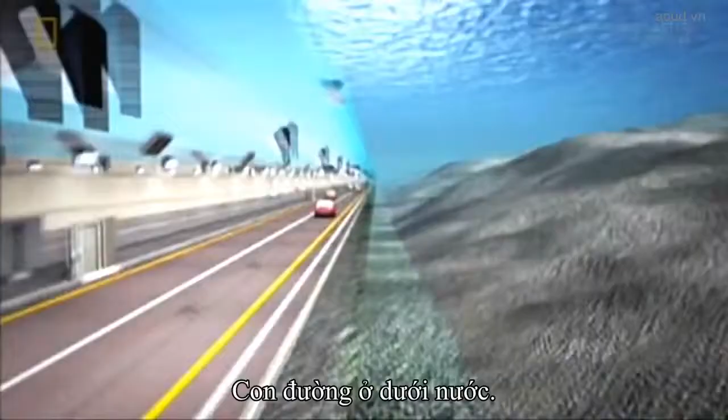Your next vacation may be spent in a paradise you've never heard of. You'll just need a way to get there. Here's the catch. That way has to go underwater. It would become the deepest immersed highway on Earth. Oh, they also have to build a couple of bridges. And did we mention the typhoons?

These tugs are towing a contradiction. A tunnel segment that's both colossal and fragile. Come back. Close. Slow down. A raft of techno breakthroughs and untested results. Bound for a place few know, to entice the world to visit. And even sway the choice for the Olympic Games.

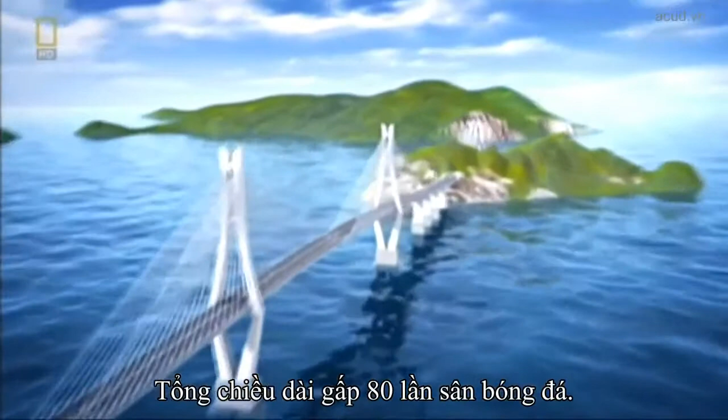The solution will slash travel time from nearly half a workday to 40 minutes and revolutionize life on both sides of the bay. The Busan-Geoje Fixed Link. A 4-lane highway that runs nearly 50 meters beneath the sea. Then it leaps across 2 colossal cable-stayed bridges. Altogether, longer than 80 football pitches. One of the biggest infrastructure projects in the world.

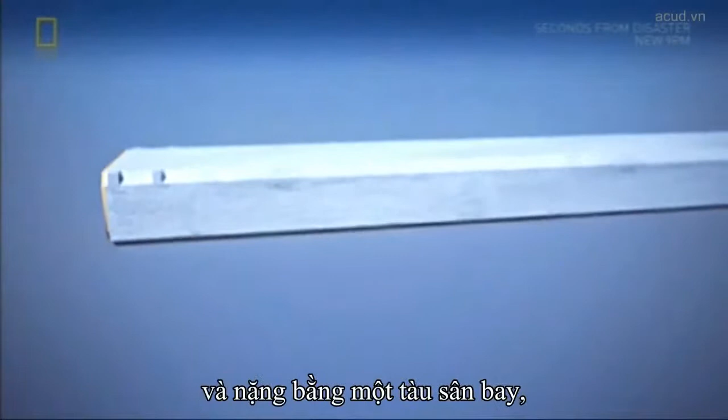Plunging 48 meters below sea level, the link will boast the deepest immersed roadway in the world. The tunnel will be composed of 18 mammoth segments, each as long as 2 football pitches and as heavy as an aircraft carrier. Wide enough to carry 2 lanes of traffic each way, with an access tunnel between. That's the concrete reality. Now, here's where it gets dicey.

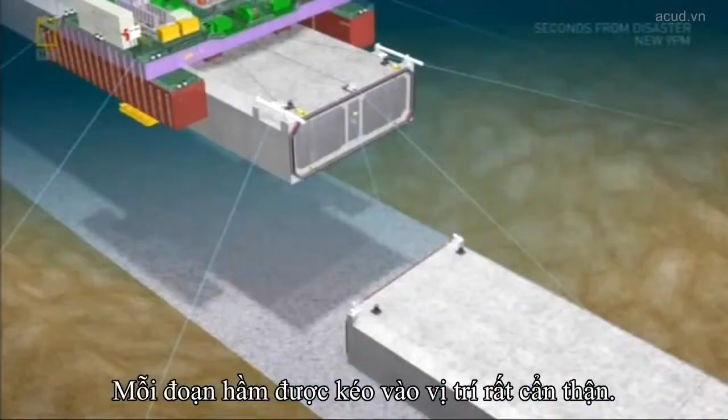Each segment has to be carefully towed into position, then carefully sunk to the seabed. And all the segments have to align within 35 millimeters, less than a thumb's width. Weather adds its own demands. This site is exposed to the open sea. There are always high waves, and the water is deep as well.

It is wide open to the Northwest Pacific Ocean, so we have extreme exposure conditions for the construction period. So we've got to be ready for whatever that sends us, like big swell waves, strong winds, and even occasional typhoon. Building a tunnel like none ever seen will take techniques like none ever tried. Yet the Koreans have never built an immersed tunnel. But this country has.

The Dutch have 5 centuries of experience at holding back the sea. Het afzinken van tunnels. Tunnel immersion is actually a Dutch speciality. If you look at the number of immersed tunnels in the world, most of them are in the Netherlands.

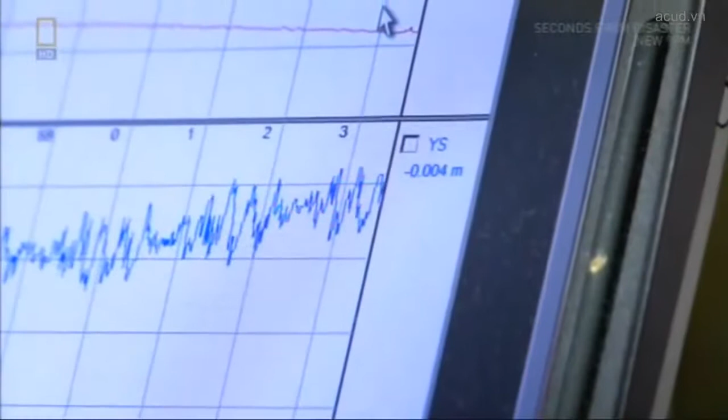The Dutch company had a zest for a challenge and the confidence that they could solve these problems. And so we were able to trust each other. That's how we ended up working with the Dutch. This is what confidence looks like.

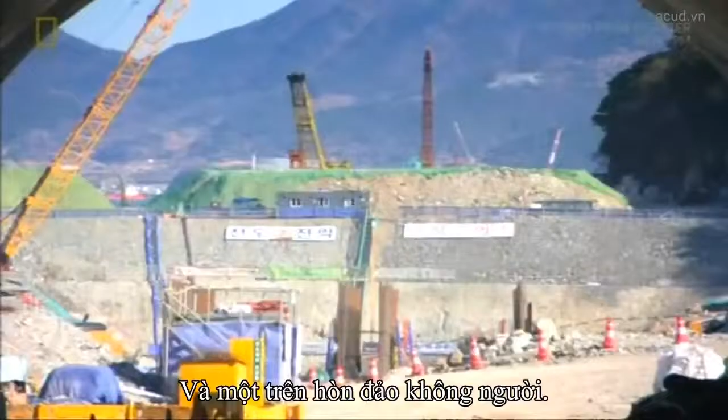Construction begins with the tunnel entrances. One on Gadeok Island, the other on an uninhabited island. From here, engineers will dig down to 12 meters below sea level to meet up with the undersea tunnel segments. But they won't tunnel through the seabed itself. If they did, the gradient would be too steep for driving. Instead, Peter's crew will lay prefabricated tunnel segments on the seabed.

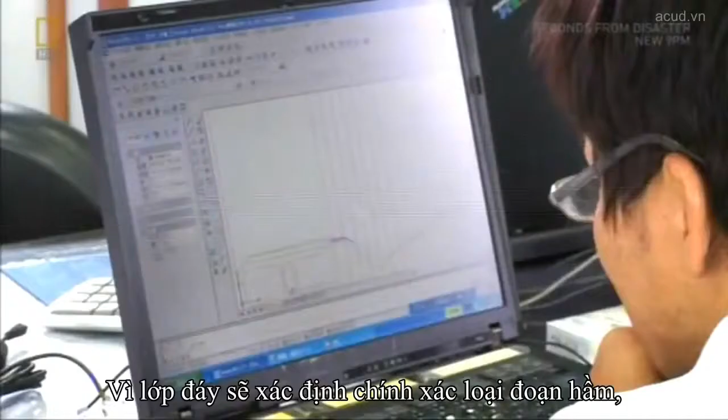First, engineers dredge a trench where the tunnel will rest. To buttress the foundation, they bore concrete columns into the seabed, stopping 3 meters shy of bedrock. The reason? Earthquakes. Avoiding bedrock will give the tunnel crucial flexibility. The segments will rest on a bed of gravel to ensure an even surface. Because the bed determines the exact height of each tunnel segment, the gravel must be placed with pinpoint accuracy.

Later, the entire tunnel will be covered with thousands of tons of crushed rocks to protect it from collisions with ships or anchors. Because the tunnel segments will be prefabricated, the first challenge is finding land for a construction yard. Not an easy task in Busan. If you look around, there's not a single metre of flat land anywhere that a contractor can use as a base for the construction period.

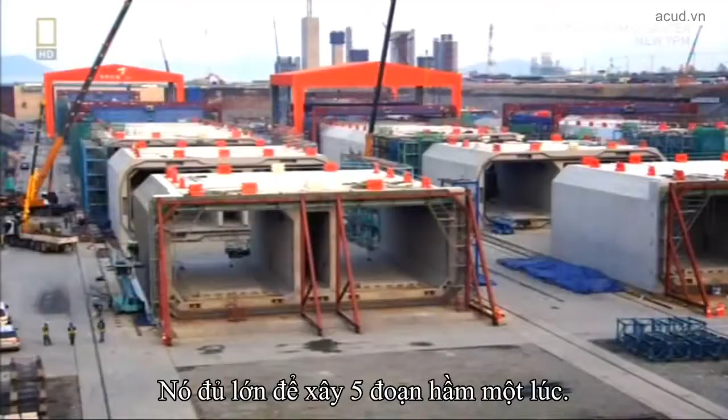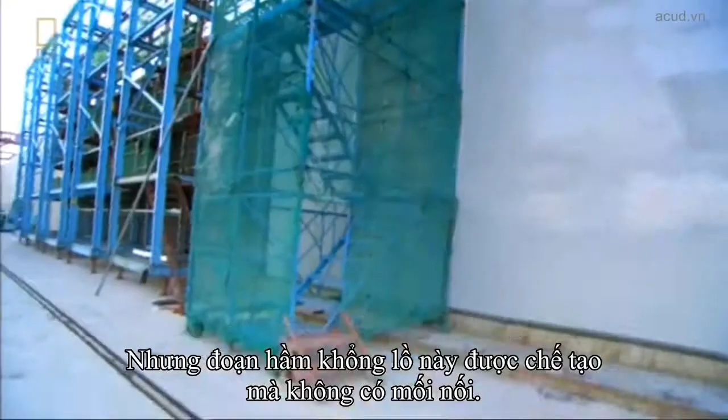From the tunnel site, the closest spot lies 35 kilometres away. It's big enough to build up to 5 tunnel segments at a time. Each segment weighs about 48,000 tonnes and is made of 8 subsections, each twice as long as a London bus. Anyone with a basement knows water can penetrate concrete joints, potentially disastrous in an underwater tunnel. But each giant section is cast without a single joint, thanks to Korean ingenuity.

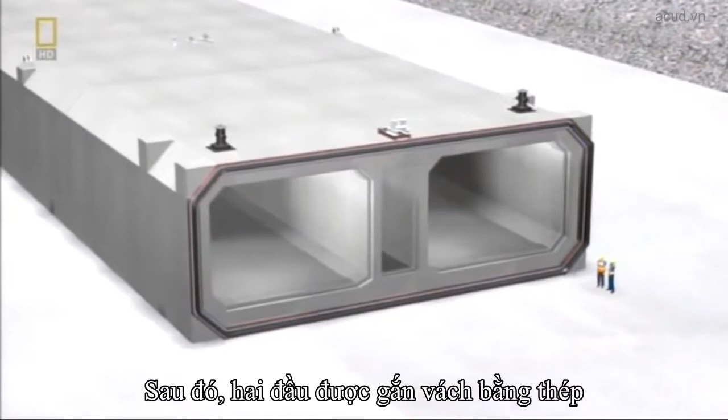We continuously poured full sections from the ground up to the top of the walls to eliminate gaps in the walls. A process lasting 24 hours. After casting, the ends are sealed with steel bulkheads, a Dutch innovation best appreciated later on the bottom of Jinhae Bay. The bulkheads are watertight because these babies are about to take a bath.

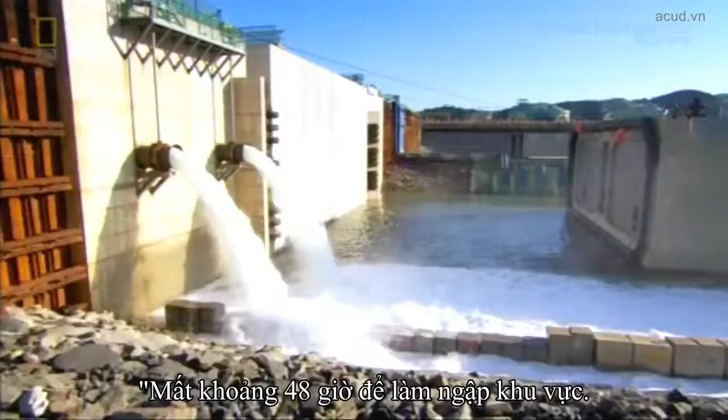Flooding the dry dock will allow them to float the segments out to sea. The inundation of the dock takes approximately 48 hours. During the first phase, we let in water until it reaches the level of the bulkhead door. Then we'll check to see if the bulkheads are leaking. Once all the leaks are repaired, or if there are no leaks, we'll fill up the dock completely. It's enough water to fill 230 Olympic pools.

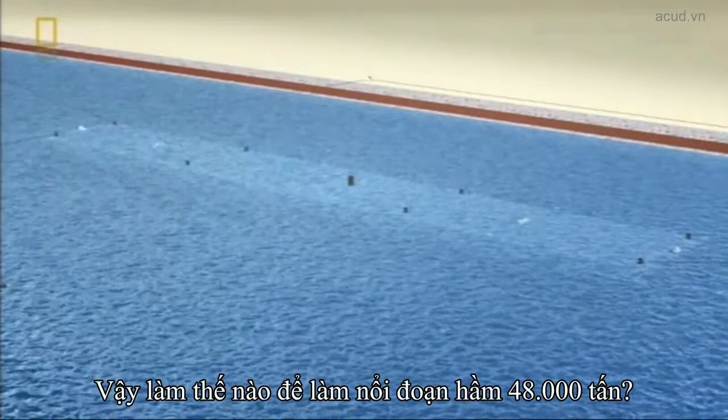So how do you prep 48,000 tons of dead weight to float? Inside every tunnel segment, there are 6 ballast tanks, and they're filled with water.

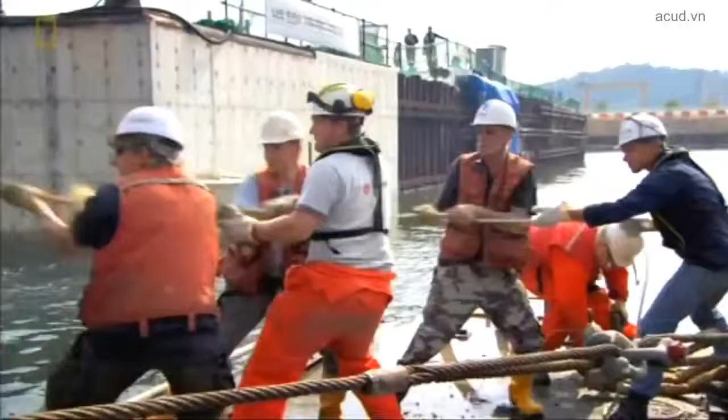To start the flotation process, we begin pumping out the water. We continue until the tunnel segment starts floating. What the tugboat has to do is to tow that slow. Then with the other winches at the backside, we control the tunnel element sideways direction. Now they can begin to warp out the segment. Removing the first segment takes brawn and finesse to avoid colliding with the dry dock.

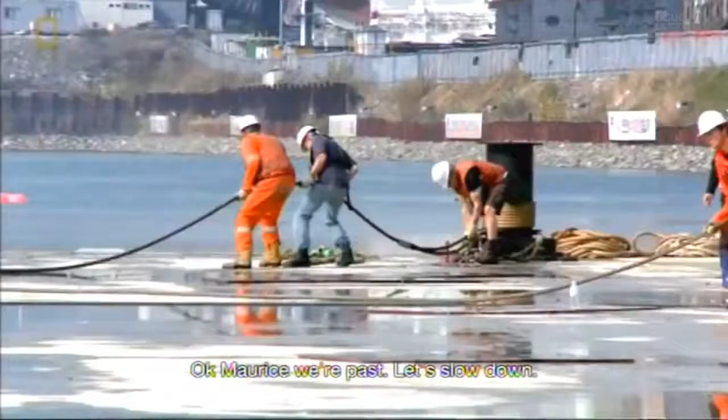Believe it or not, clearing the dry dock was the easy part. While work continues on the undersea tunnel, the rest of the Busan-Geoje fixed link starts to rise. 2 giant bridges. One with 3 pylons, the other with 2.

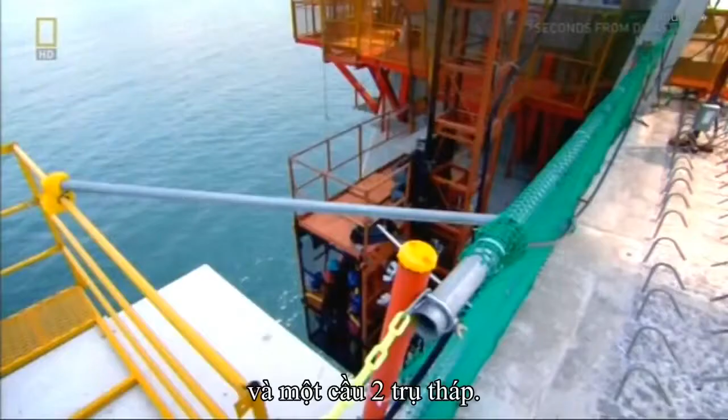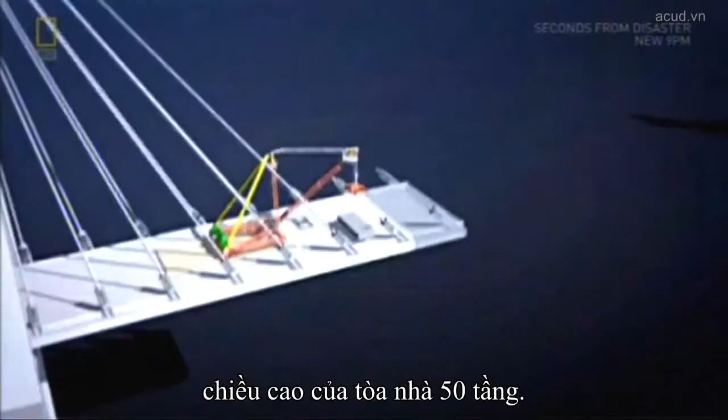At its topmost, the 2-pylon bridge will soar 156 meters above sea level, the height of a 50-story building. The span between the pylons will stretch the length of 5 football pitches, with enough room for the tallest freighters to pass under. Crucial for a city that thrives on shipping for its livelihood.

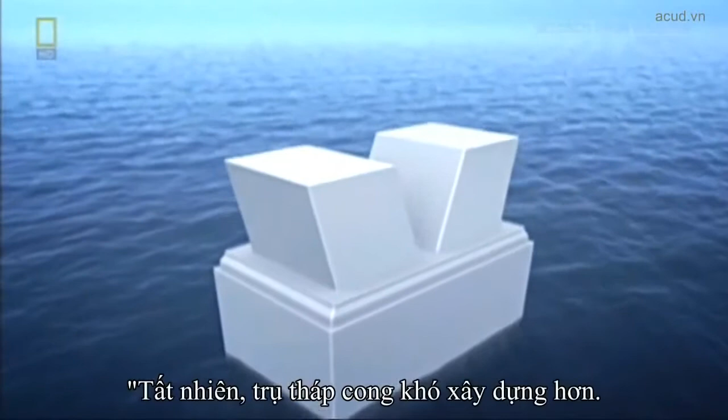The most pleasing aspect of the bridge is also the most daunting. Its curved diamond shape. Of course, curved pylons are very difficult to construct, but they're very much in harmony with the surrounding scenery in many ways, in that they bear resemblance to a mother's praying hands and to the wings of seagulls.

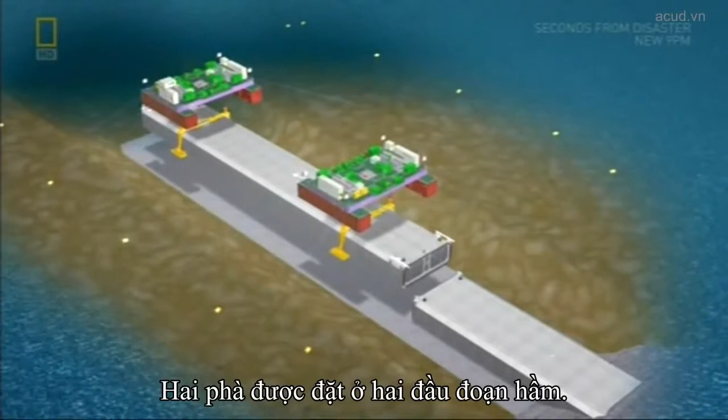35 kilometers away, the first 5 tunnel segments arrive at a temporary mooring site. From here, they'll travel across Jinhae Bay to their resting place on the sea floor, already leveled and lined with gravel. And here's how they'll get there. Pontoons the size of a mansion. Dutch designed, Korean made. One pontoon is positioned near each end of the tunnel segment. After arrival at the tunnel site, mammoth winches on pontoons will lower the segment to the seabed. At least, that's the theory, because it's never been done in the open sea.

A specialist diving team prepares the first tunnel segment for the immersion operation. Divers test connections for data systems and power supplies. Standing by. And remove marine growth from the bulkhead. Down on the wire, please, Steve. Down on the wire. Finally, they install steel wires underneath the tunnel segment, crucial for positioning during immersion. In a good position now, we can come up on the wire. Coming up on the wire.

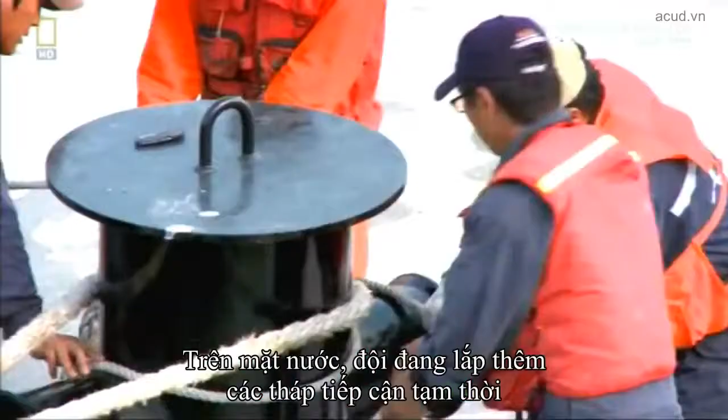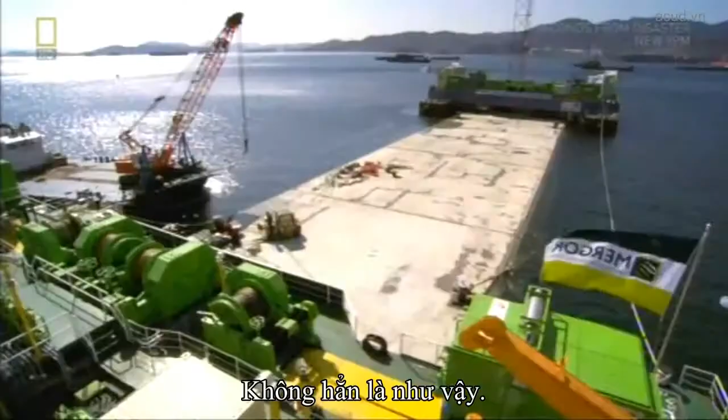Above water, the crew are also adding a temporary access tower, so workers can enter the segment in case of trouble with the ballast tanks. Over, the tunnel is clear. Every problem has to be anticipated, because if things go south, they won't get a second chance. What we do doesn't have anything to do with luck. We know what's involved, we know how the process works, and we have the feeling we control the whole process. Not quite. Back in Holland, the rest of the immersion team stands by to fly out. In all, 56 men wait for Peter to say go, and he's waiting for a forecast.

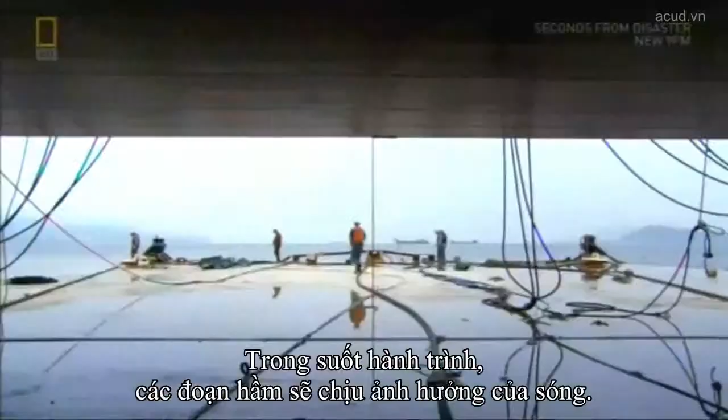When the wind blows from the south, swells roll in from the Pacific. Because we're situated offshore, we have to deal with waves. And these waves can be pretty fierce. Even swells barely 30 centimeters high pack so much force they could fracture the subsections that form the tunnel segment. Throughout its journey, the segment will be at the mercy of the waves, so the team needs 3 days of calm seas. Strukton looked around for a forecaster, but few dared to stick out their neck for such a costly guess. Then, a Danish company seized the challenge. They came up with a model to predict waves as small as 10 centimeters, up to 5 days out. A stunning breakthrough in forecasting.

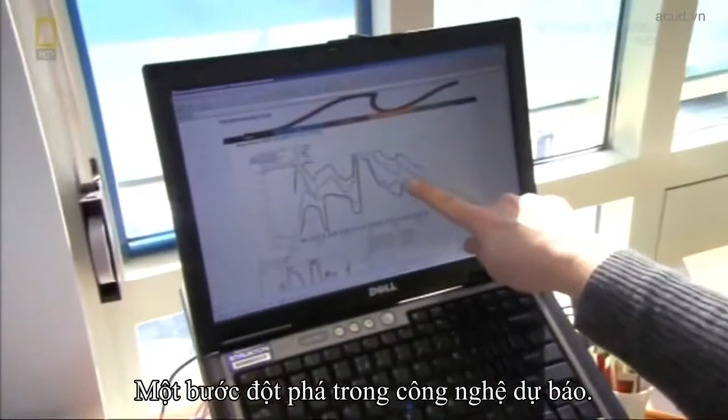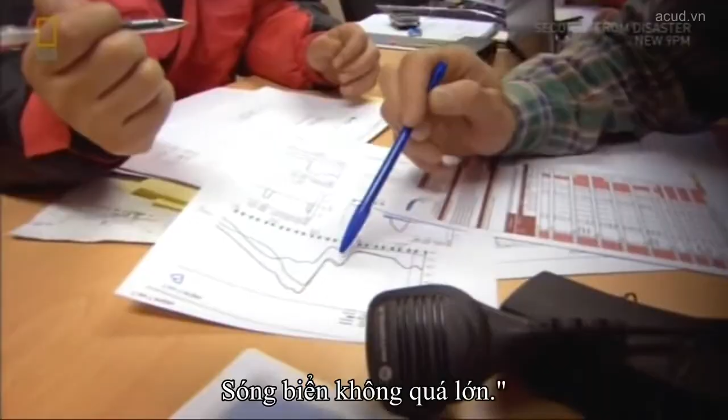That means we're able to say, tomorrow we can do an immersion. And that means we're able to put people on the plane yesterday, really on a last-minute basis. It takes away a big risk for us and for our client. We've got the weather. They're all showing the same prediction. The swell still not as bad. I would say we have a go. Green light. We'll try. We'll try, right? Okay, thank you. Yes, bye-bye. Ahead lie 48 hours of tension for the boss. Six months of work rides on steel threads and a forecaster's guess. Tonight, no one will sleep soundly.

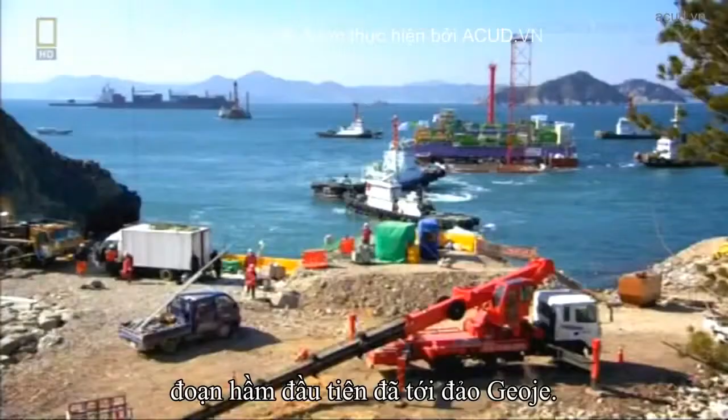After a cautious voyage at 3 kilometers an hour, the first tunnel segment arrives at Gadeok Island, the starting point of the tunnel. Joining Peter is the elite team fresh from Holland, among the few men on the planet who can do this job.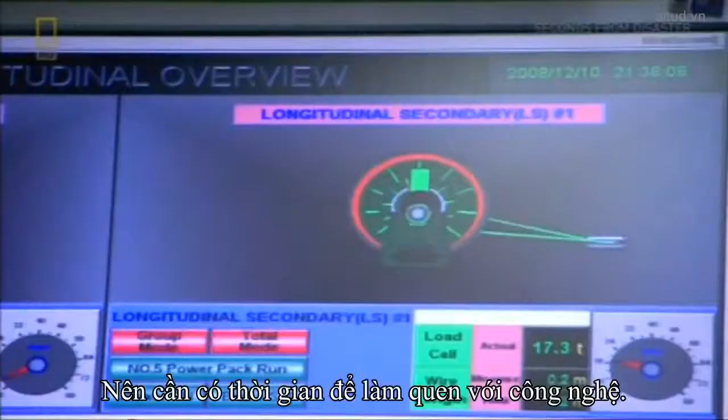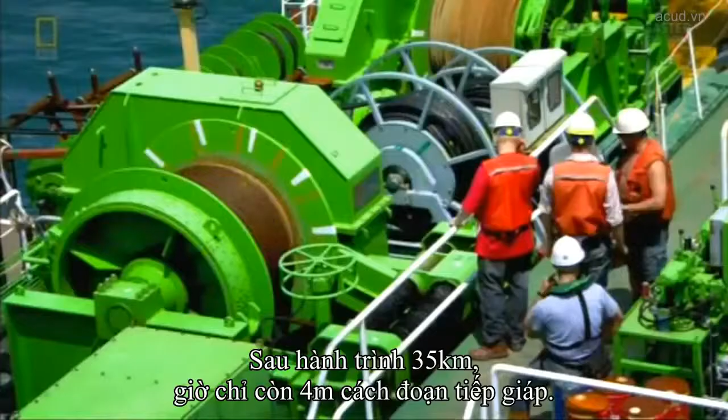The ordeal will take all day and end either with an engineering triumph or a 48,000-ton disaster. With so little clearance and so much at stake, the segment moves at a snail's pace. After a journey of 35 kilometers, it's now just 4 meters from the abutment.

We've worked really hard for half a year to prepare for this moment. 56 of our people are here to execute this operation. The Koreans are excited and tense because they've never witnessed this. We've done it more often, but still, a very special moment.

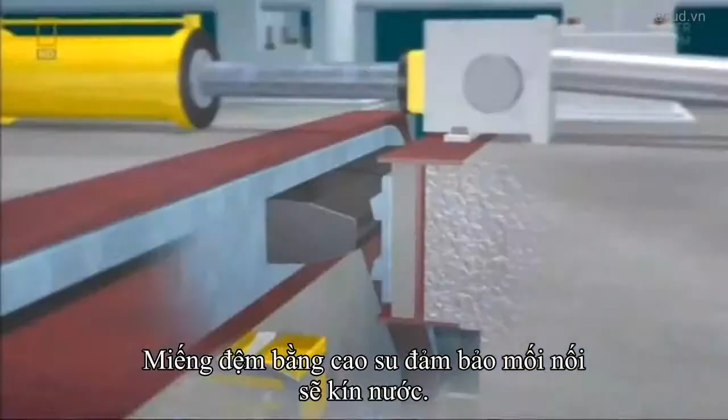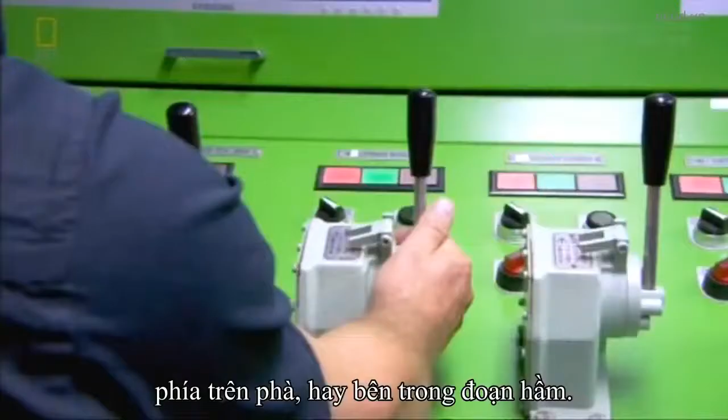Till now, steel plates have protected the leading edge of the segment. Easy down. Behind them is a component as crucial as it is fragile: a rubber gasket to ensure a watertight connection with the abutment. Now they're ready to begin the descent. Operated by remote control, the ballast tanks slowly fill. The command post monitors everything via remote control cameras, on the pontoons and inside the tunnel segment.

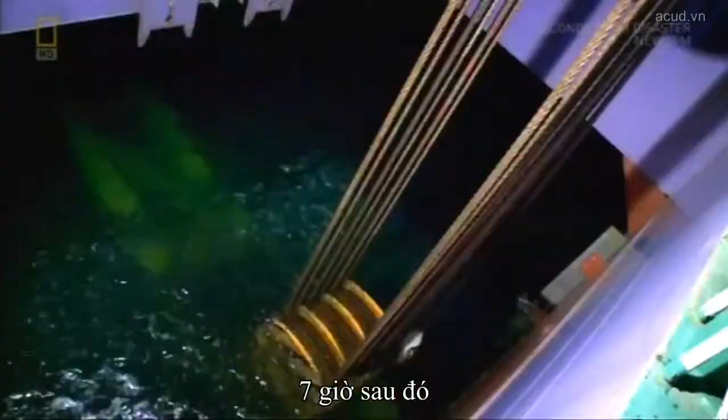7 hours later, touchdown. The segment now rests just 50 centimeters from the abutment, the mouth of the landward tunnel. To close the gap, engineers have installed a pair of powerful hydraulic jacks. Linking the jacks and applying tension closes the gap. The final stage begins from the landward side.

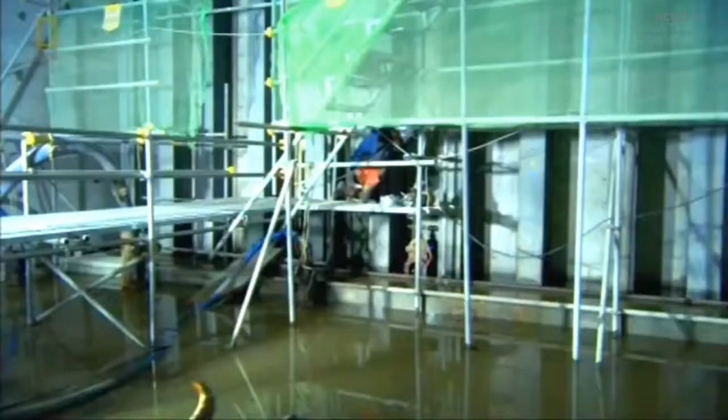A wall of water nearly 3 meters wide separates the segment from the abutment, what they call the immersion joint. Opening this valve will force the water out. As the immersion joint empties, external pressure will further compress the gasket for a watertight seal. The echo from the bulkhead reveals the water level in the joint. With the water drained, they can open the bulkhead door.

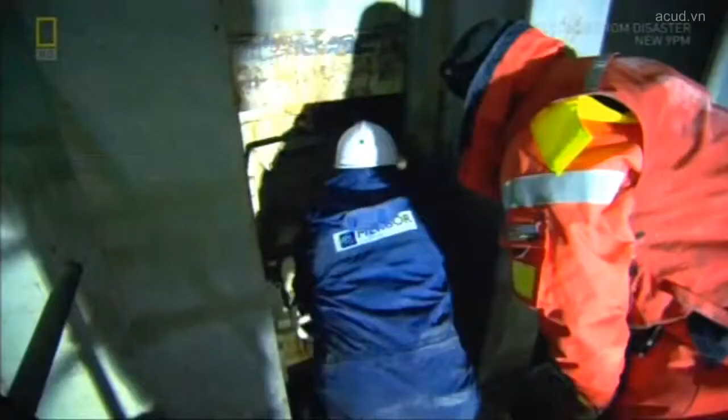But the lock's jammed. You knew that it was going to break? Huh? Did you know that? Because you took the toolbox with you.

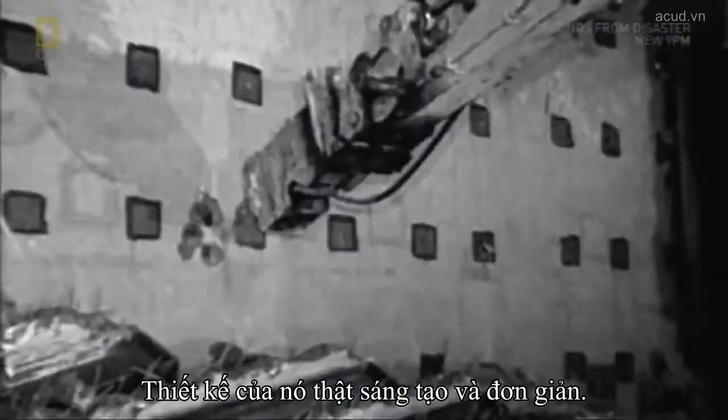This calls for cruder technology. All that stands between the crew and the first immersed segment is the steel wall installed back at the dock. And here is why it's so brilliantly simple. On other tunnels, engineers seal the ends of segments with concrete, then knock it out after immersion. But that takes time and creates debris.

The modular steel bulkheads are easy to install, easy to remove, and they'll be reused on every segment and eventually recycled. Faster, cheaper and safer. An engineering trifecta. Finally, open sesame.

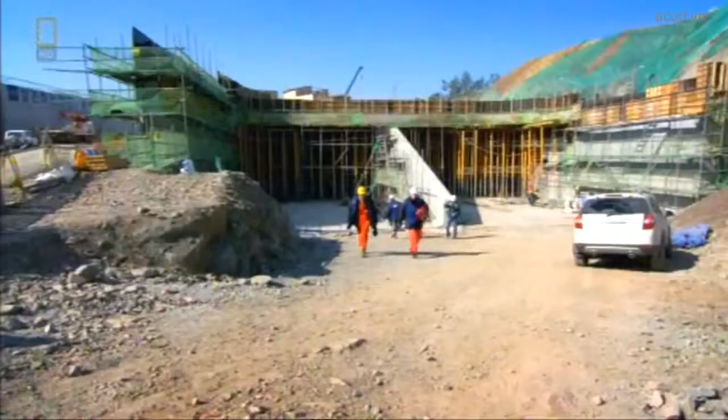Although we experienced some unexpected things, we were very happy that it was completed successfully in the end. And the feeling of accomplishment was indescribable. Their marathon operation lasted almost 78 hours. Some have gone 2 days without sleep. One down, 17 to go. And they won't all go smoothly.

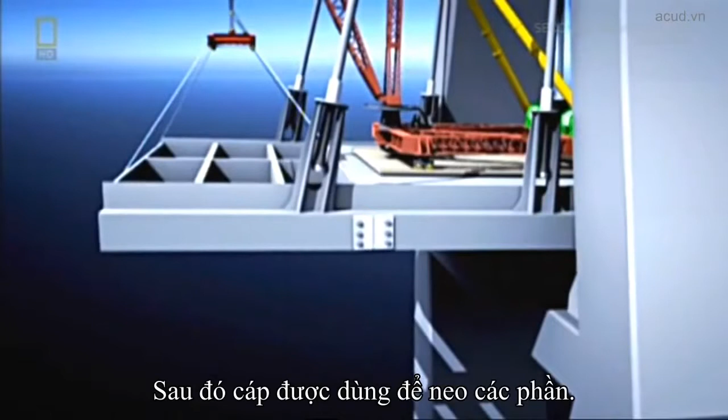Like the Busan Tunnel, the bridges advance in segments, but 2 at a time, not 1. It's called balanced cantilever construction. Working outward, steel segments are laid on each side of the pylon to keep the bridge in balance. Then 2 cables are attached to brace the segments. Once they've done that, the derrick crane then lifts up 6 precast concrete panels and places them onto the steel frame.

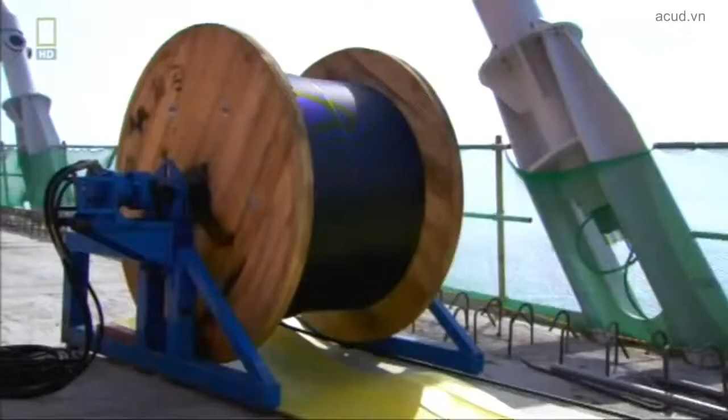Then put a final post-tensioning into the cables. And we're ready then to start the whole thing over again. Back at the tunnel, the team have installed 12 concrete segments. But now they're heading for 48 meters, the deepest water and the hardest challenge.

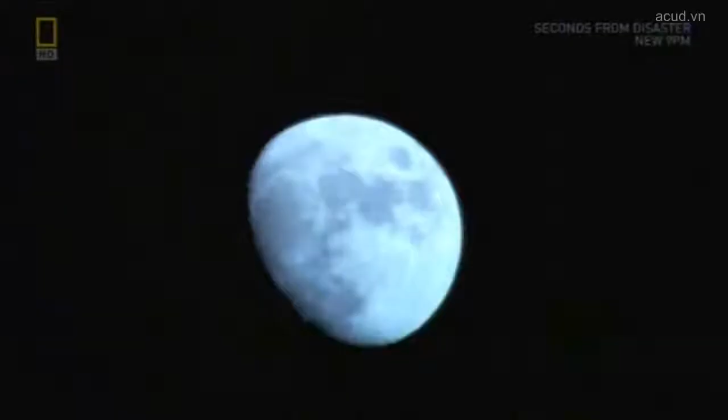The sea floor out here is soft clay, so they need to set anchors that can hold the segment and pontoons fast. Stevmantas, named for their fish-like shape. They're designed to dig in where other anchors lose their grip. Once segment 13 arrives here, 14 steel cables connected to the anchors will hold it in position.

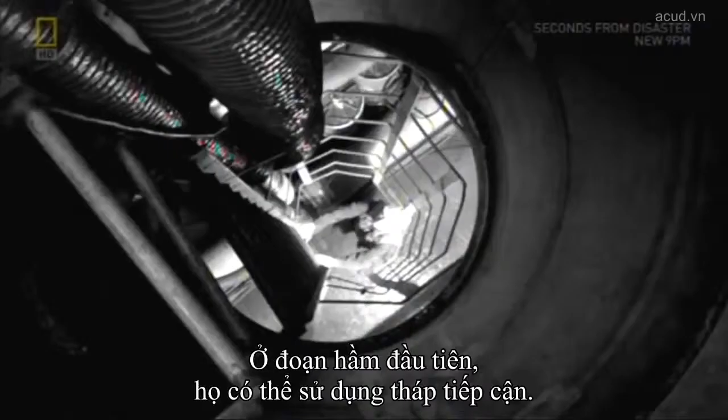But once again, deep water raises the stakes. Once the segment hits the bottom, suppose a problem arises with the ballast tanks. Somehow, Peter would need to get the engineers inside. On segment 1, they could use an access tower, but not in deep water. The solution is a first in tunnel immersion, a self-propelled diving bell. Purchased in America, the sub was refitted just for this project.

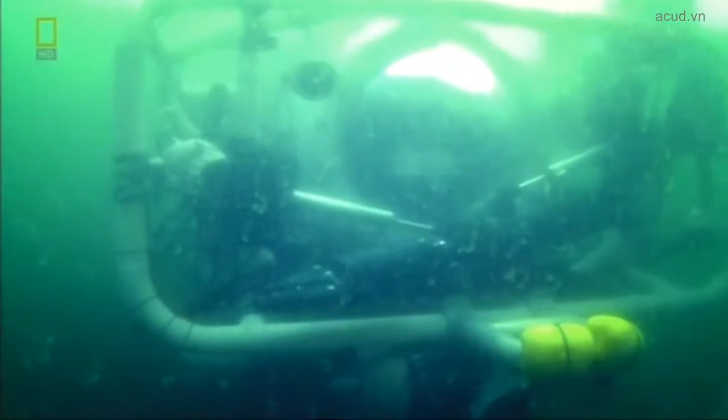I'm coming down to 15 meters, see if we can get the tunnel on sonar. This is the tunnel element here. That's probably a bollard on the corner.

With a little boat like this that can go to 300 meters, you've got the concept of a ferry transferring people to the tunnel segment. It's 9 meters long, with room for a pilot, co-pilot, and 5 engineers. It can dock on a landing tower on the segment for watertight access to the tunnel.

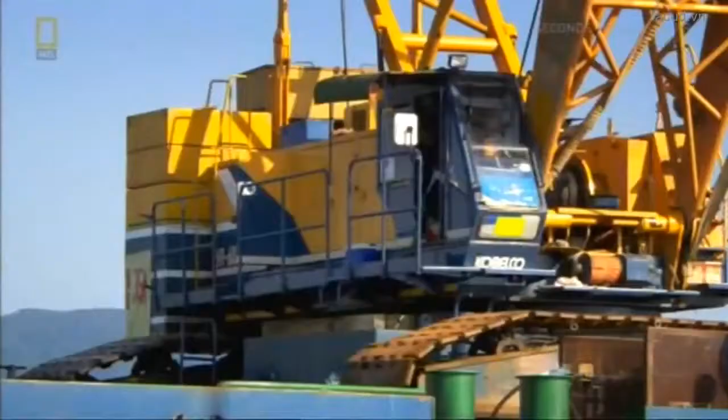Deep water poses another problem. Monitoring the position of the segment as it's lowered, because one misalignment would be disastrous. To calibrate the position of the first segment, surveyors took readings from prisms mounted on the access tower. But remember, there's no access tower here. So once more, the Dutch devise a smart, simple solution. It's named for what it is.

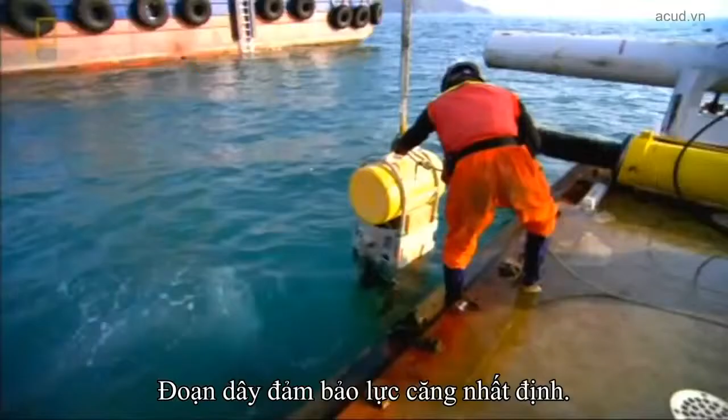A taut wire. One end attaches to the leading edge of the segment to be immersed. The other end attaches to the previous segment. The taut wire ensures the connection stays under high tension. Positioning the device is a delicate operation. This custom-made model is the only one in existence. Breaking it is not an option.

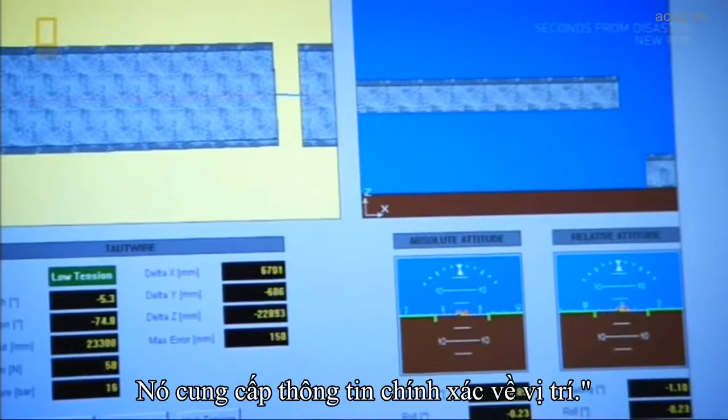When this segment descends, a computer will record the length and angle of the wire, allowing the team to monitor the segment's position. The taut wire is now under high tension between this segment and the previous one. And as the segment descends, the wire automatically retracts and becomes shorter. So that provides us with exact positioning data.

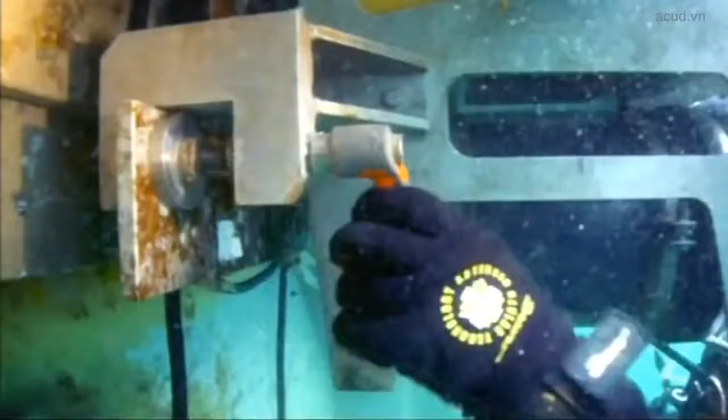To fine-tune the position of the segment on the seabed, 4 of these sensors are attached, one on each corner of the bulkhead. Another custom innovation for this project. And wait till you see how accurate they are. The whole operation is remote controlled from the command unit on the pontoon. With one click, they start filling the ballast tanks.

You can feel the tension building up now. And then we all have one question. Can we do it again? Can we get it in position? It's the same tunnel, but it's farther away from the coast. It's deeper, the weather, everything. So many aspects make it different every time, so you have to stay alert.

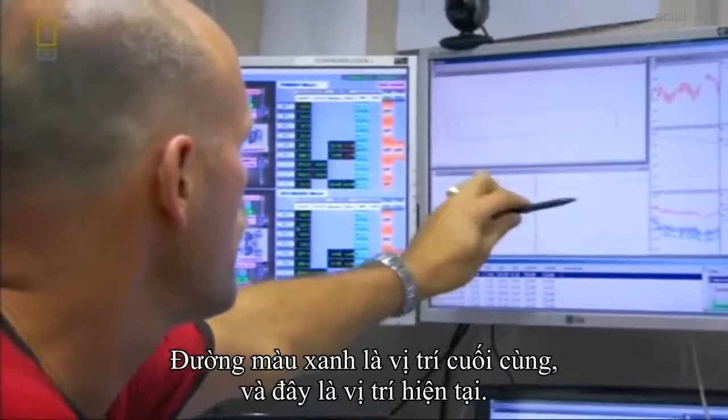All the data feeds into Peter's computer and refreshes the position of the segment every second. This is the tunnel where we have to go to. The green one is the final position, and this is where it is now. So you can see it's just below sea level.

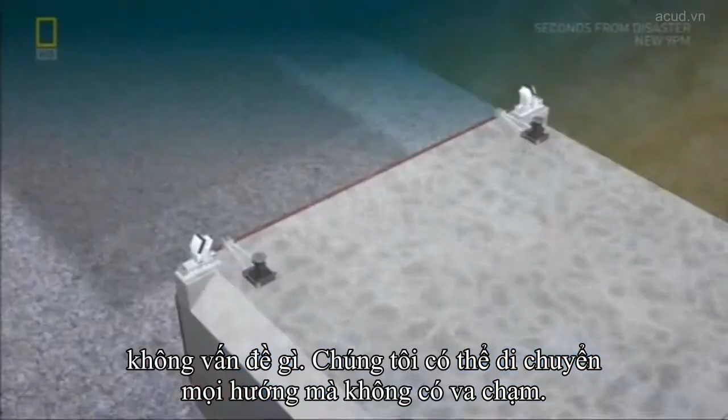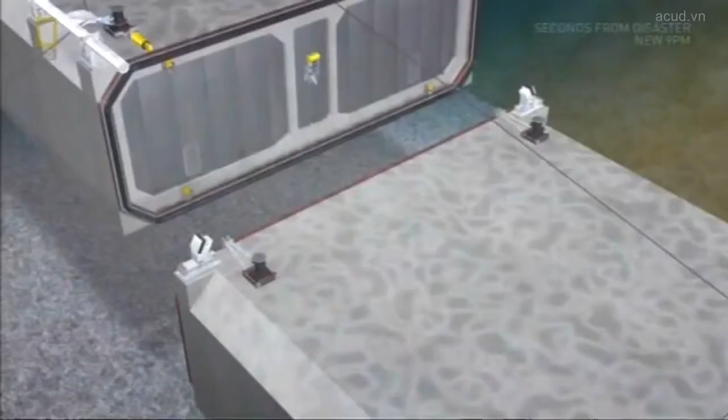The first step in joining the segments poses another challenge and another solution. The moment a tunnel segment approaches the one ahead of it, it's moving because of the swell. So we install 2 guide beams on the top end of the segment. Another simple but elegant solution. The moment we pull them closer together, the guide beams become less flexible. The movement diminishes until the segment is motionless.

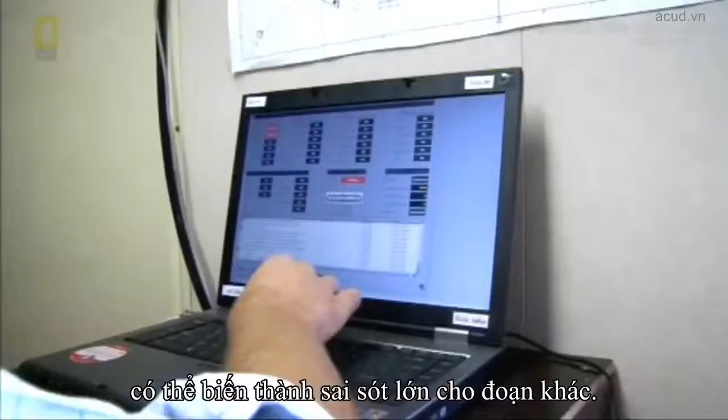With only 50 centimeters separating the segments, and in near zero visibility, a diver connects the hydraulic jacks. The segments seem aligned, yet the slightest error on this end will translate into a big mistake at the other. But the Dutch don't miss a trick.

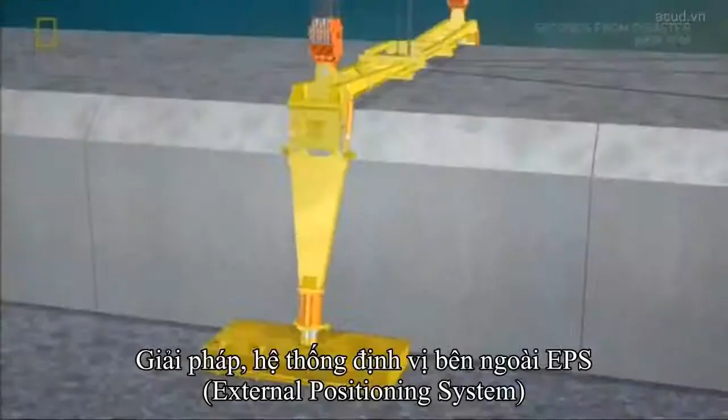The solution? The External Positioning System, or EPS. Yet another Dutch invention based on a simple idea. A pair of hydraulic legs and extendable feet to hold, lift and move the segment. Connecting each pair of legs are 4 steel cables, already installed back at the mooring site. Braced on its robot legs, the EPS laterally aligns the segment into its correct position. Now, the jacks are tightened by remote control, compressing the rubber gasket.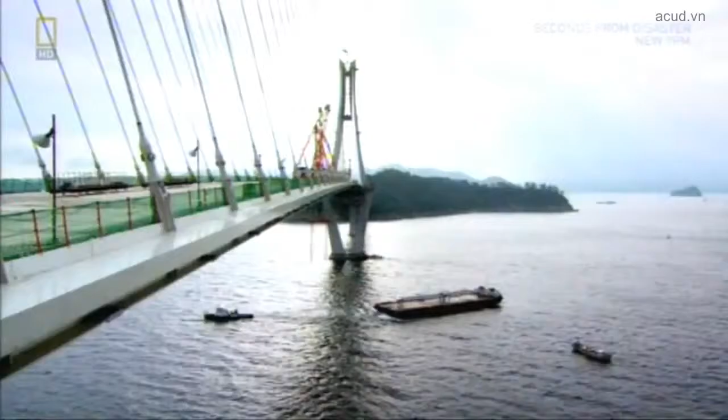Done. One more segment, complete. Like the tunnel, the bridges approach the final stages. Before the 2-pylon bridge can accept its last section, engineers have to perform a stretching exercise, as tiny as it is powerful. Both pylons have to be pulled back about 7 centimeters to create enough space for the key section to be placed.

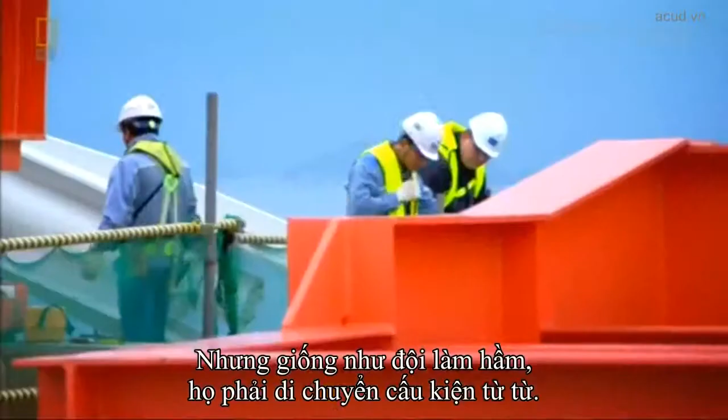Once the tension is released, the final section will have a tight fit. After 6 years, they must be eager to finish. But just like the tunnel crew, they have to move in baby steps. Because this baby is a giant.

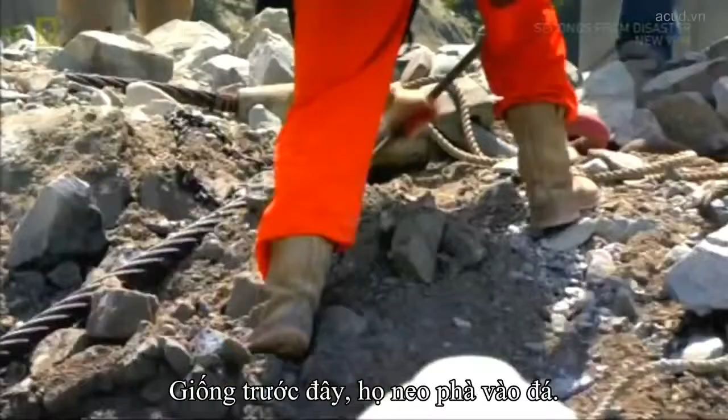A few kilometers away, Peter's crew prepares to install their last segment. Just like the first segment, number 18 has to be maneuvered between rocks. As before, they run some of the anchor lines from the pontoons to the rocks. Because it's so close to the island, it's very difficult to install the immersion wires. Connecting them isn't easy by any means. It's not just a matter of simply pulling them in place.

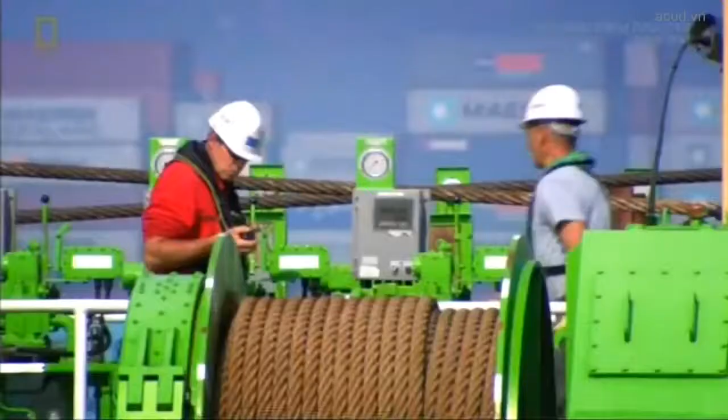With all cables attached, they can start maneuvering the segment into place. Because this segment is extremely heavy, we can't afford even a small mistake. Light contact can cause huge damage to the segment, and that kind of damage can set back the entire project. After 3 years, they'll open the last tunnel segment tonight, if all goes well.

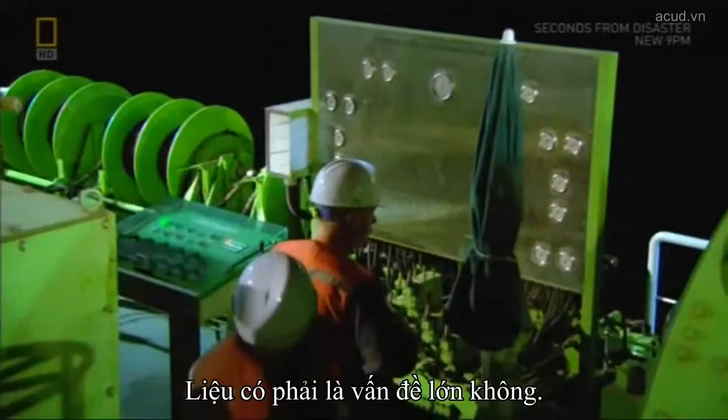The segment hits the bottom, but there's trouble. One end is sitting 28 centimeters too high. We're now trying to figure out what the cause is. We don't know yet. It's a major problem at the moment. We're taking about half an hour to go through all the steps so that we don't miss anything, and then I'll inform you about the situation.

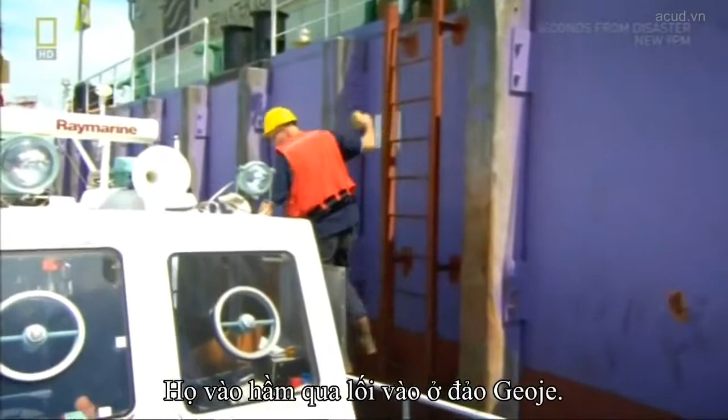The gravel foundation under one of the EPS feet is overbuilt, so they'll have to remove the foot. And the grand opening will have to wait one more day. After final adjustments, the last tunnel segment now sits squarely on the sea floor. All that's left is entering the tunnel to seal the joint with the final segment. They'll enter via the tunnel entrance on Gadeok Island. It's the last time Peter will make this trip.

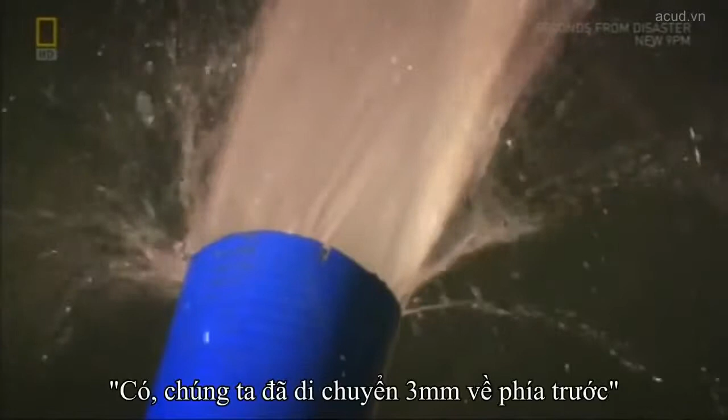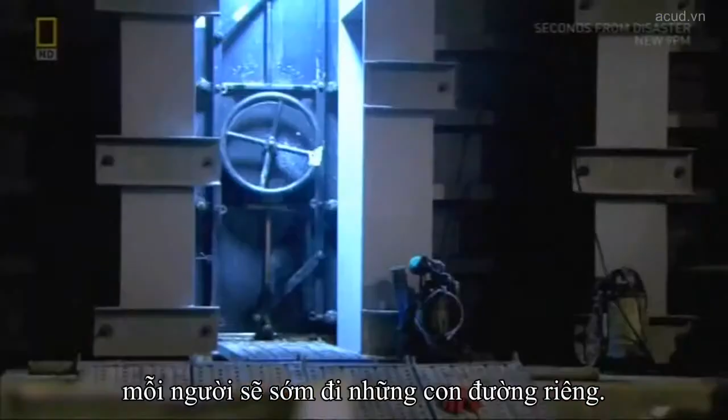They always celebrate this step, but today is the grand finale. Once complete strangers, now firm friends, and soon to go their own way. The end of their long journey lies behind this bulkhead door, and the honor of opening it falls to Peter.

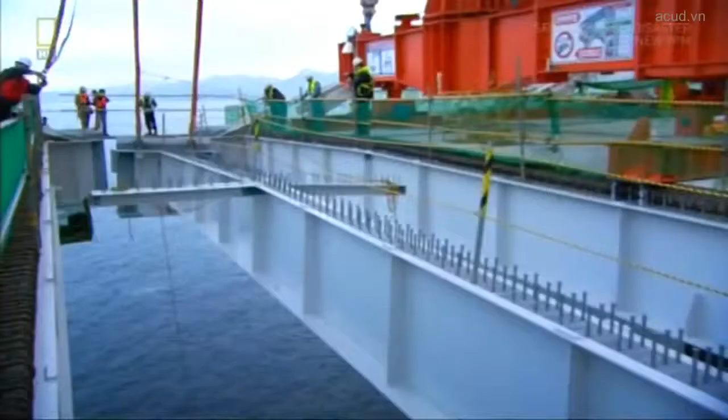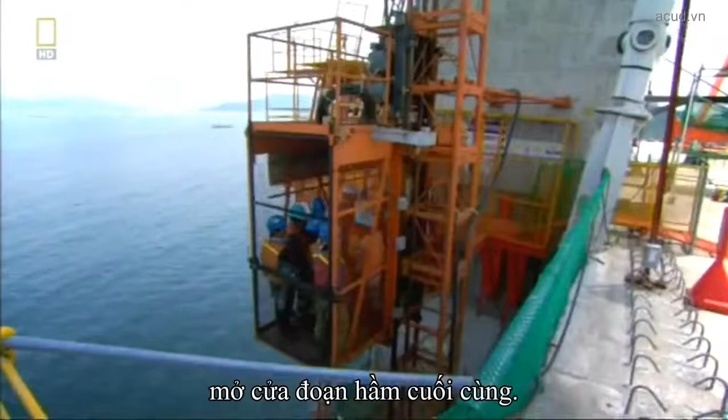Back at the bridge, the final section is lifted into place. Once the tension on the towers is released, the whole structure will be locked in place. With the bridge complete, all that remains is opening the final segment of the tunnel. Last inspection.

Really extremely proud that we did it, and happy, of course. Happy for the whole team. It's just great. After all this time and after a difficult operation, we did it. Very emotional, yes. Fits the moment. And proud. So proud. Yeah. Geonbae.

For Peter's team, the tunnel marks another success on a stellar resume. For the Koreans, it's a chance to join the Dutch on the world stage. Actually, this was the first immersed tunnel project in Korea. And we developed lots of new equipment, and we trained lots of engineers, and eventually we could finish in time, and everything is happy. This isn't just a shortcut to an island. It's a path to the future. And who knows where that leads.